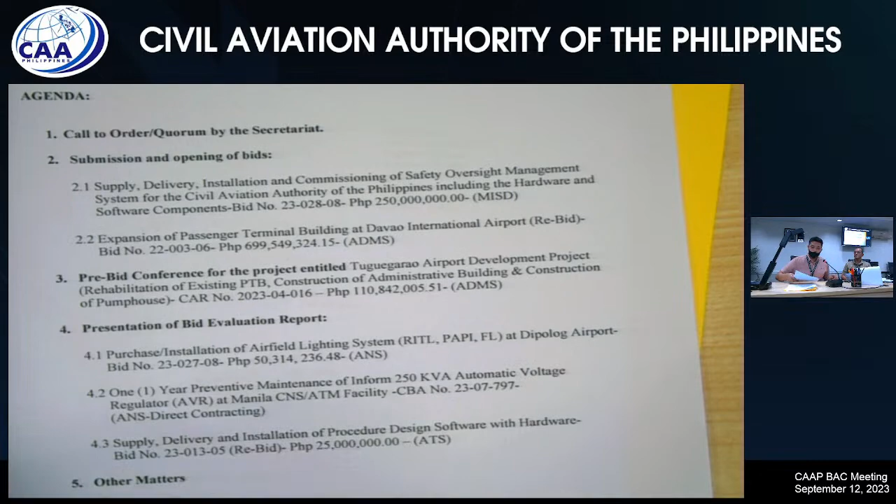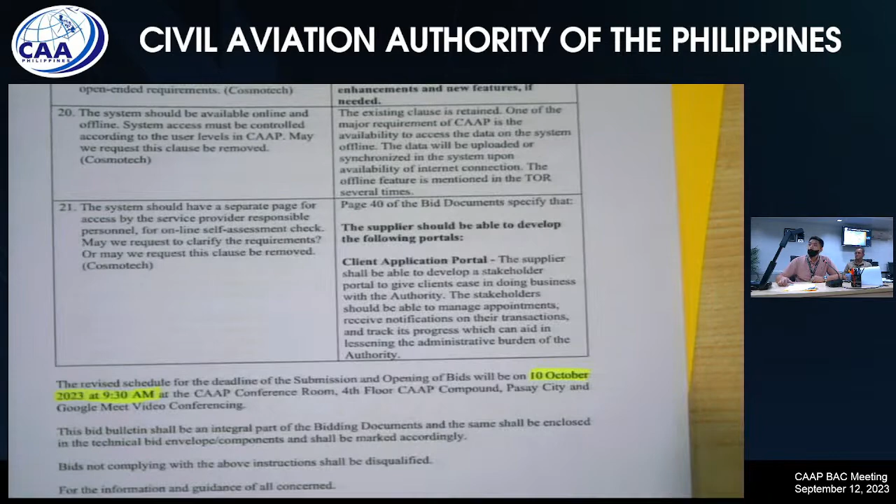For the information of the BAC, this project will be rescheduled on October 10 as per bid bulletin number 1 issued on September 11. Okay, so it was moved to October 10. Yes, sir. All right. Any comment? If not, okay, so it's rescheduled.

Thank you. Next item on the agenda, sir, item 2.2, expansion of passenger terminal building at Davao International Airport, a rebid, bid number 22-003-06 in the amount of 699,549,324.15 on ADMS projects, sir, an opening of bids.

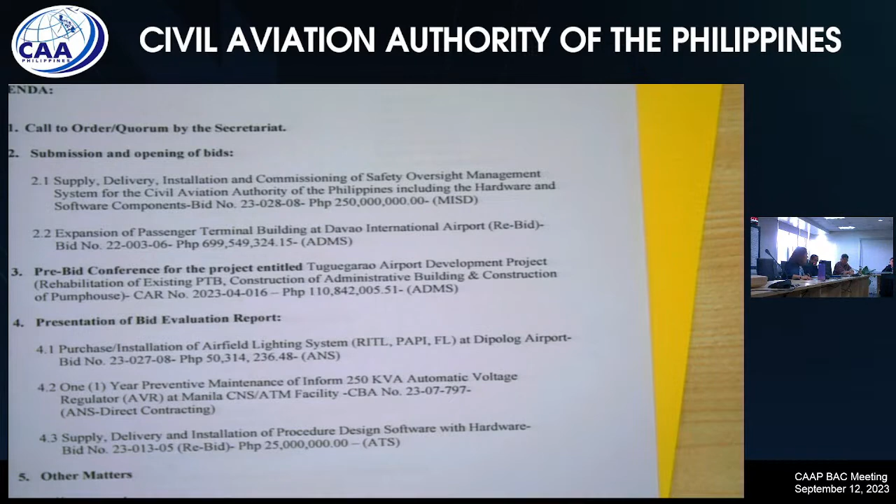Okay, and what is the recommendation? Permission to speak. Go ahead. Mr. Chair, sir, for this one, sir, just a brief background. There was a protest filed by Carwheel Construction because of their disqualification for failure to submit a bid bulletin. Sir, there is, for the information of the body, there is already a board resolution on this, setting aside the BAC's decision to disqualify CCI and order CCI to comply with the insufficient or lacking requirements in its bid.

However, sir, the Carwheel Construction was not notified that they have to submit the missing bid bulletin in their bid submission. With this, Mr. Chair, to comply with the direction of the board, sir, the TWG would like to recommend for the deferment of this item, sir, pending the submission of the missing bid bulletin, sir. And we would recommend that this project be opened next Tuesday, which is the schedule for BAC Alpha, sir.

Okay, any comment, any objection or recommendation? If there is none, so we'll defer this till Tuesday. Tuesday next week, sir. Okay, that would be September 19, sir. All right, thank you, so it's moved to next Tuesday. Yes, sir.

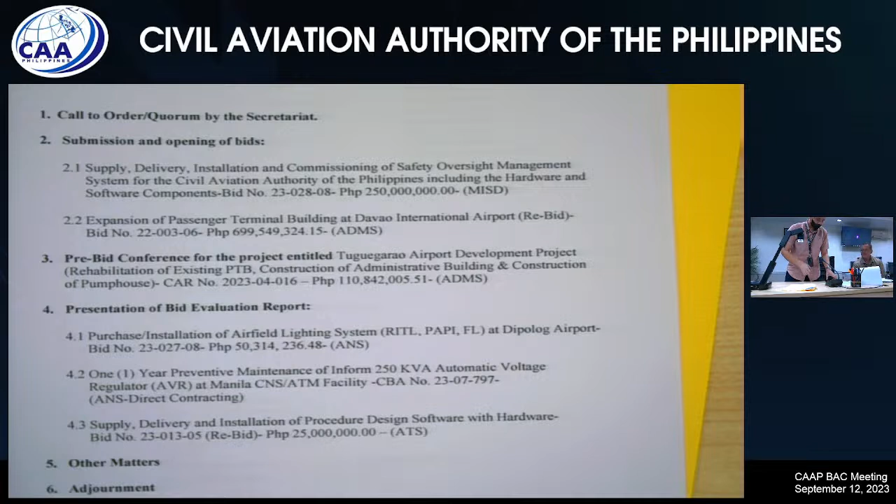Yes, sir. Good morning, sir. Okay, I'll flash the presentation. Can the Chair see the presentation, sir, before we start the pre-bid conference? We will invite the prospective bidders for this presentation. Okay, please do so.

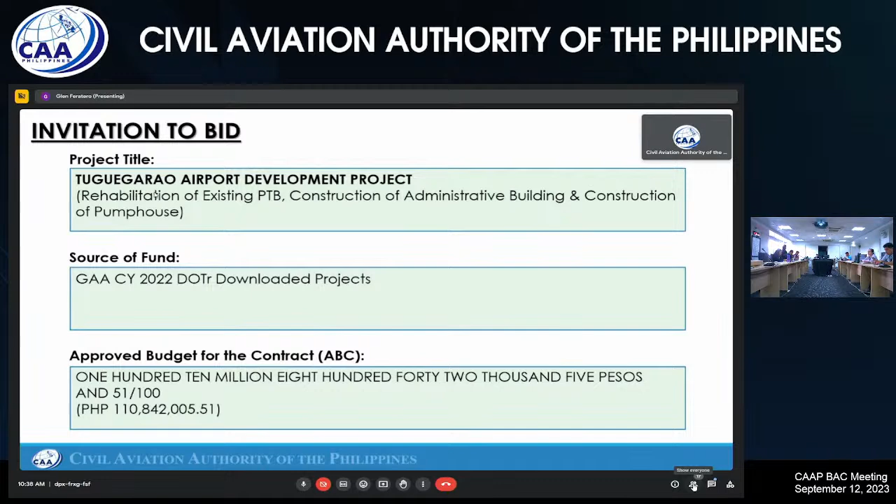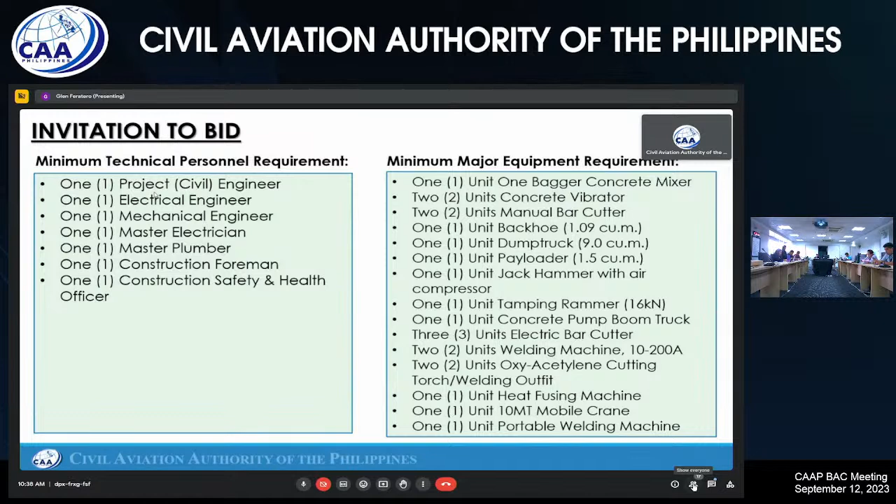Shown are the minimum technical personnel requirement, as well as the minimum major equipment requirement. The required license is medium A, license category B, building and industrial plant. The project duration is 420 calendar days, inclusive of 22 rainy or unworkable days. The applicable fee for the bidding documents is 56,000, inclusive of 12% VAT.

The bids must be duly received by the BAC Secretariat at the address below on or before September 26, 2023 at 9:30 a.m. Likewise, the bid opening shall be on the same date and at the same time, and also at the given address below.

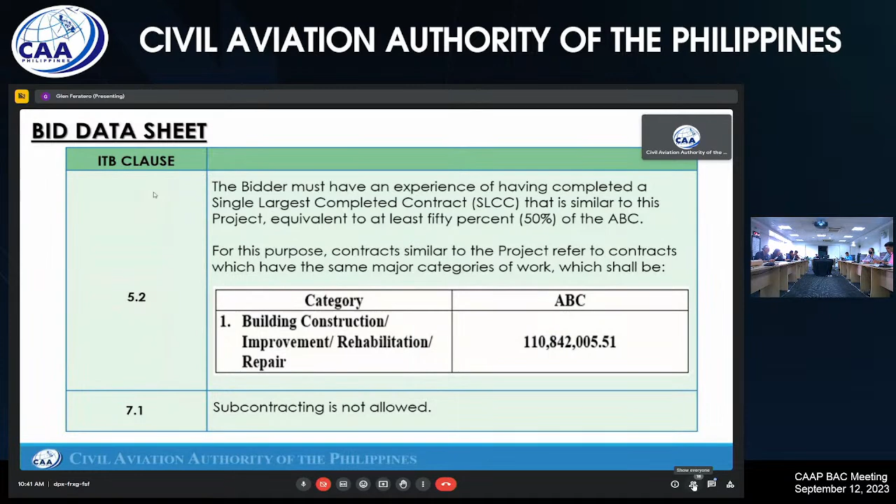The key personnel must meet the required minimum years of experience set below: general experience, 5 years in general engineering, and relevant experience, 3 years in building and industrial plant.

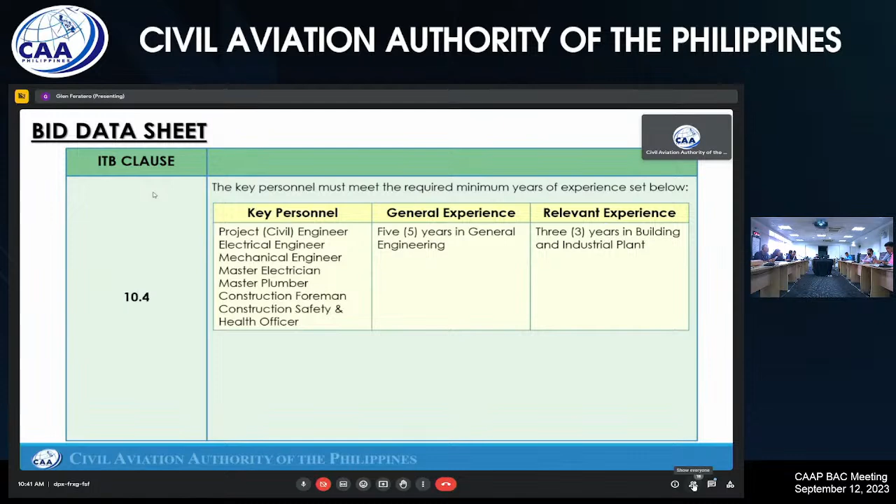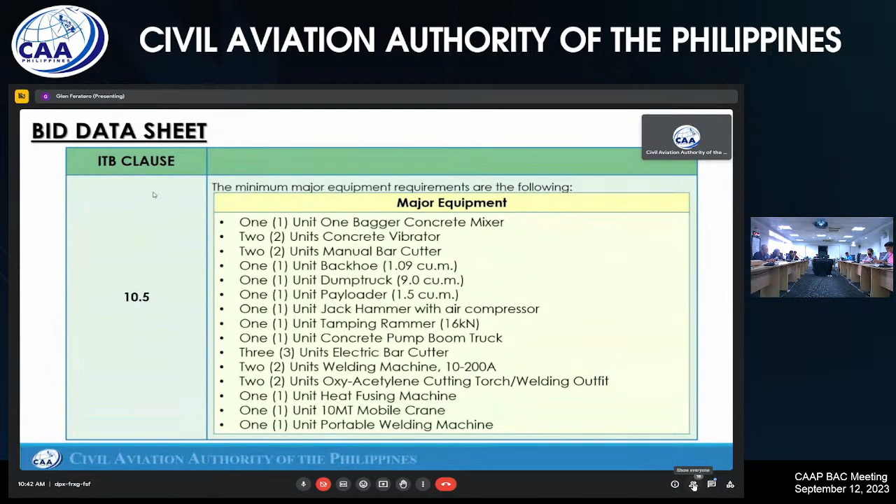Under ITB clause 11.2, bids exceeding the ABC of the project shall be disqualified.

For ITB clause 15.1, the bid security shall be in the form of a bid securing declaration or any of the following forms and amounts: not less than 2% of ABC if bid security is in cash, cashier's or manager's check, bank draft, guarantee, or irrevocable letter of credit; or not less than 5% of ABC if bid security is in surety bond.

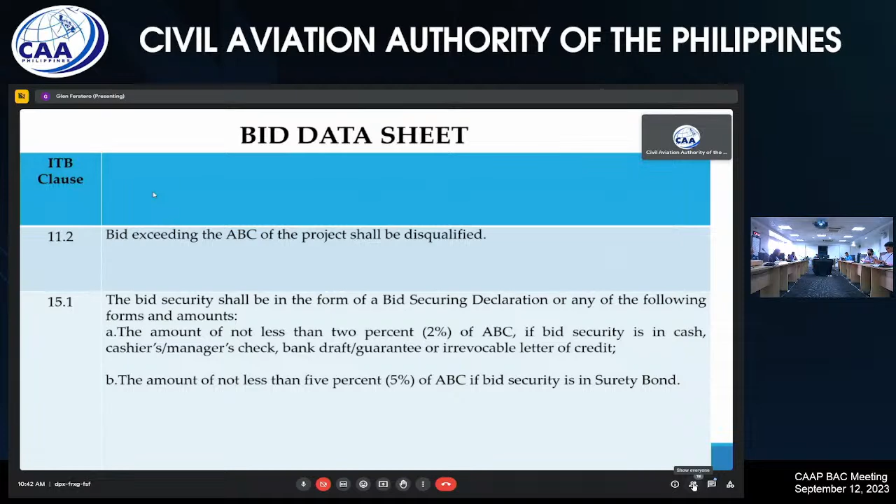Under ITB clause number 16, each and every page shall be initialed and signed by the duly authorized representative of the bidder. The submitted eligibility, technical, and financial documents shall be properly marked with index tabs and must be sequentially paginated in accurate order, in the form page 3 of 100, with the page number being the last page of the document, on a per envelope basis.

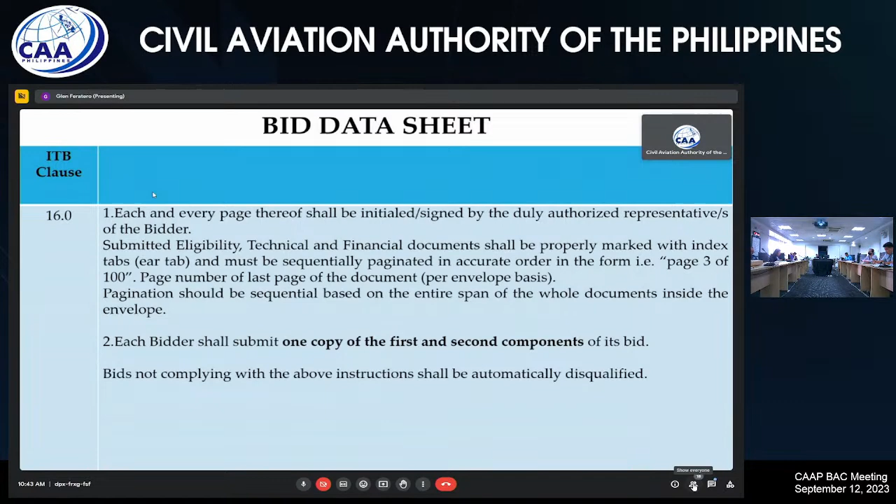Each bidder shall submit one copy of the first and second components of its bid. Bids not complying with the above instructions shall be automatically disqualified.

ITB clause number 17, the address for submission of bids is shown.

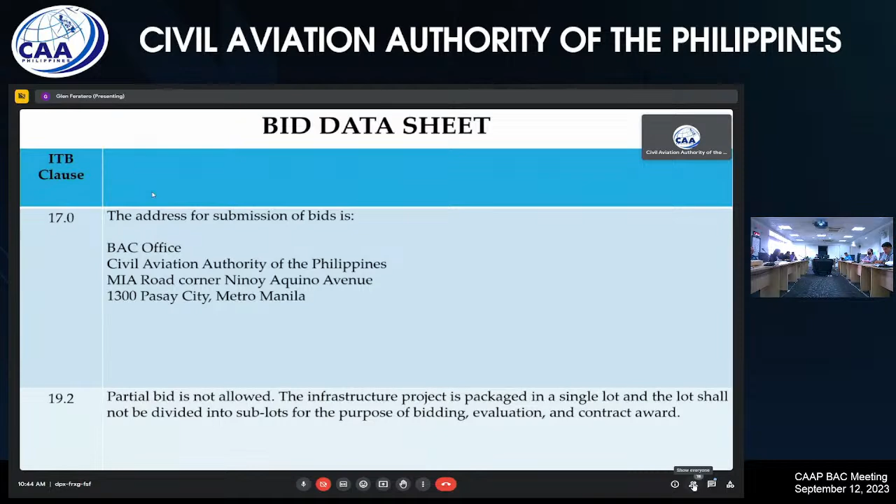ITB clause 19.2, partial bid is not allowed. The infrastructure project is packaged as a single lot, and the lot shall not be divided into sublots for the purpose of bidding, evaluation, and contract award.

Under the special conditions of the contract, these are the items that need to be considered by the prospective bidders.

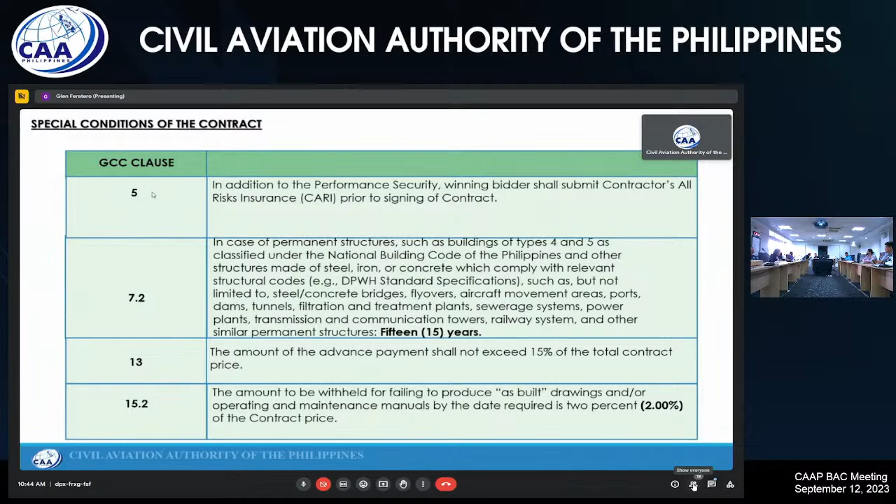This is the site development plan of the project. The red one will be the location of the construction of the pump house.

The green one is the rehabilitation of the existing passenger terminal building, while the blue one is for the construction of the admin building.

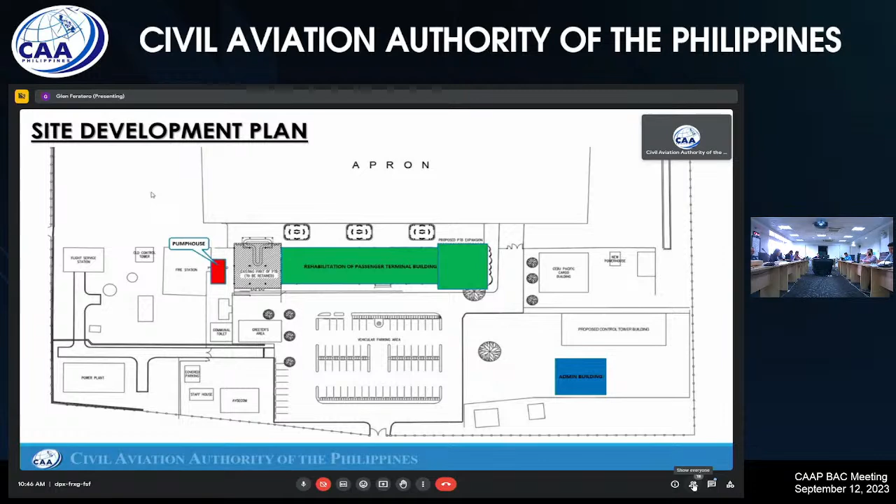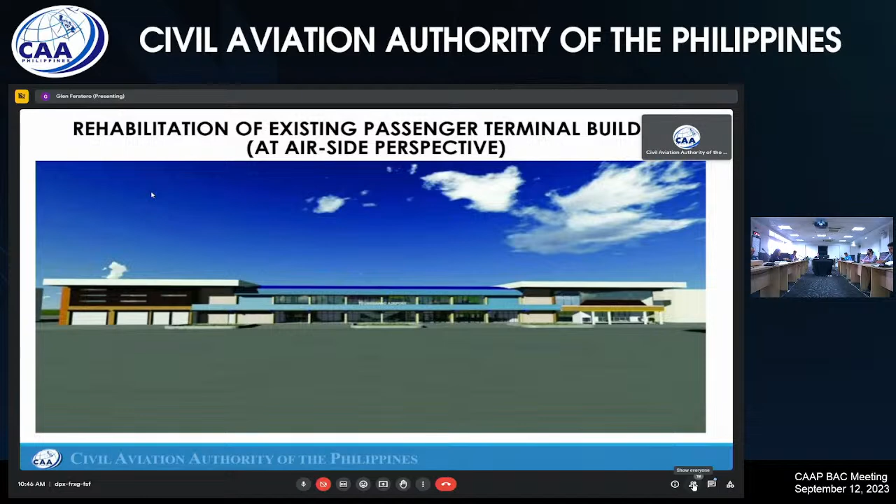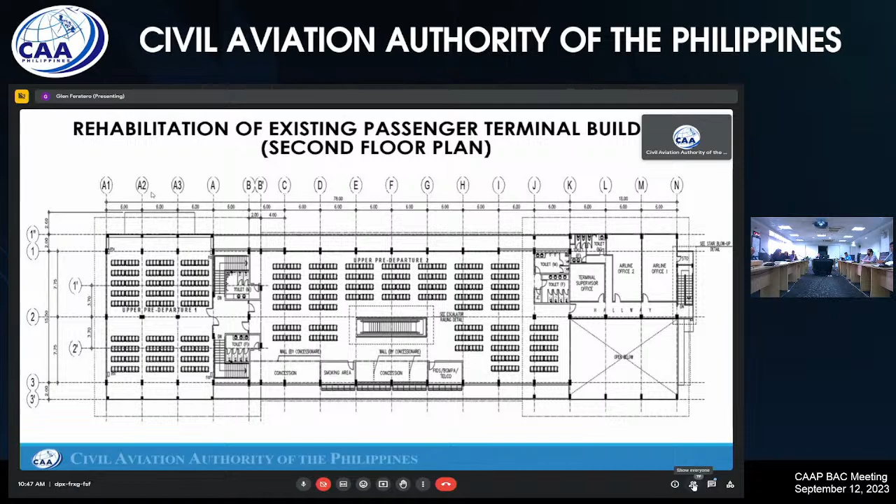The second floor plan, and the roof plan.